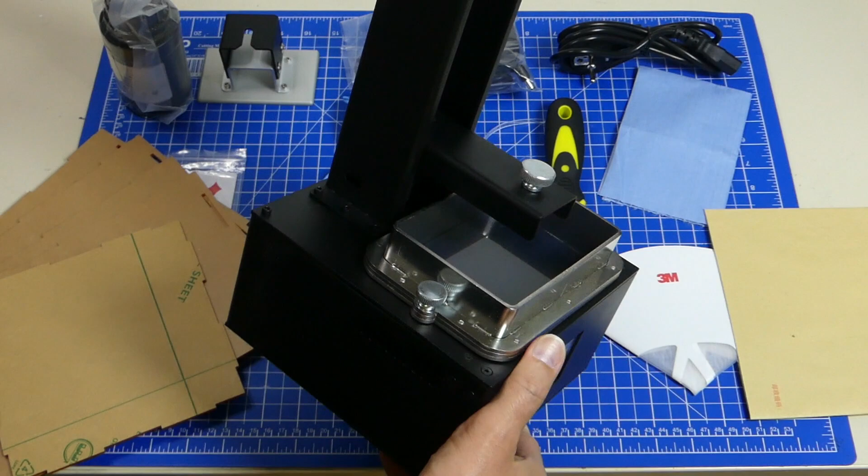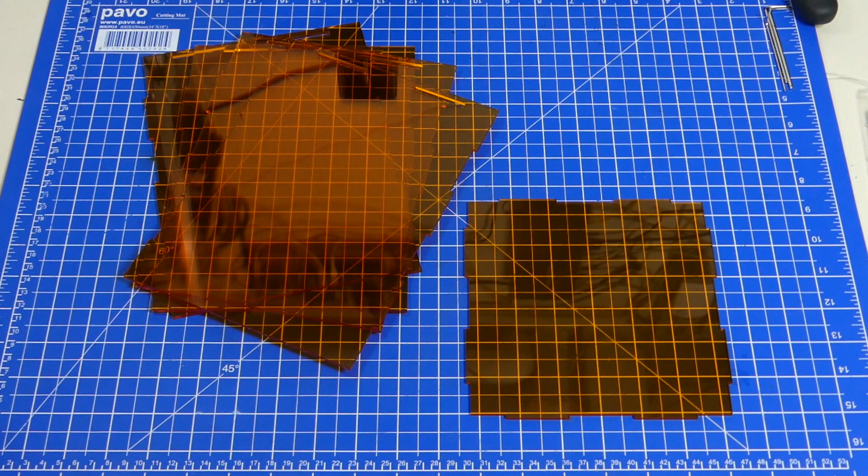There's also a manual in the box, which is surprisingly good. I went ahead and removed the protective film from the sheets of acrylic, and it's actually really simple how these fit together. They're just one pattern, and this just follows on all around.

And that is also what the rubber bands were there for, because once you have it all in one piece, you're supposed to put the rubber band over it, and that's going to hold it together. That is simple but pretty effective. So far, it's true that it comes with some assembly required, but this is extremely simple.

Let's see if we can get the rubber bands to go on. So, here we go. Right, so this is not the way to do it. Let's try again. And maybe this time we'll just start from the other side. So maybe it's not as easy as I thought, but it's also not that bad. If you pull it over the edge of the table, it is actually pretty easy.

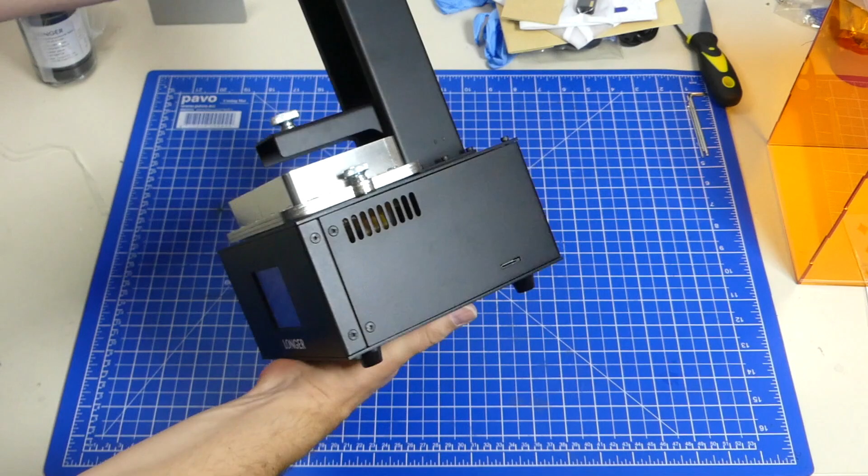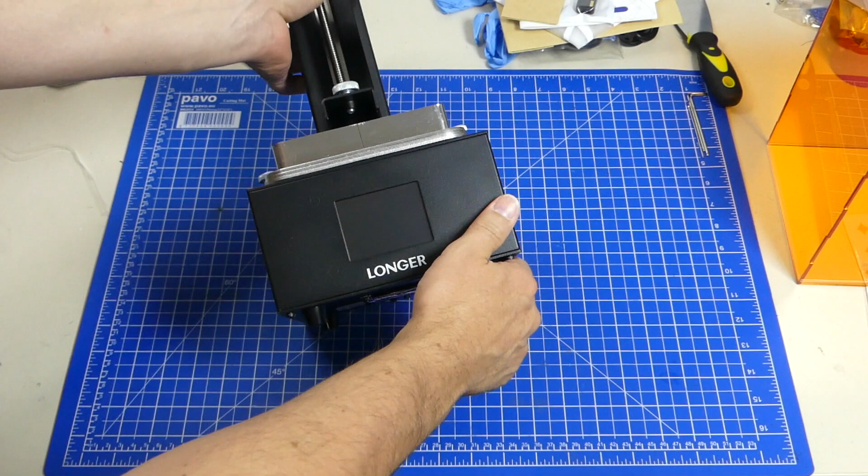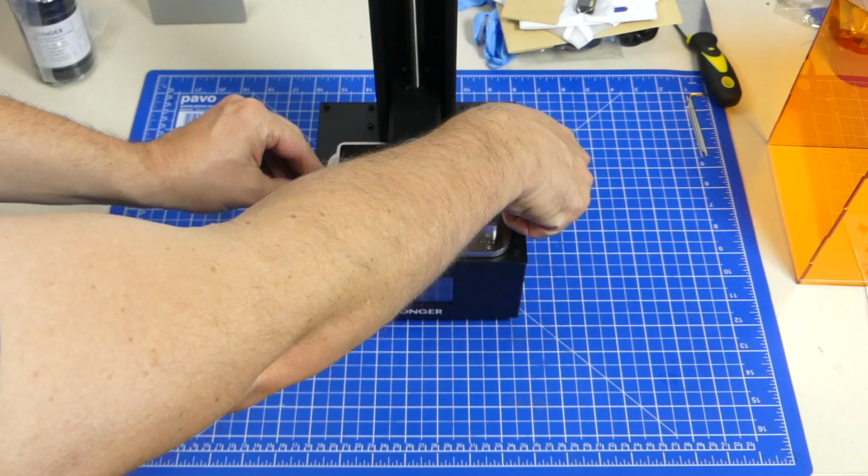Pretty simple: power connector, power switch, SD card slot, and display with touch interface, and the reservoir for the epoxy or the resin. That is in here. The FEP film is also already in there.

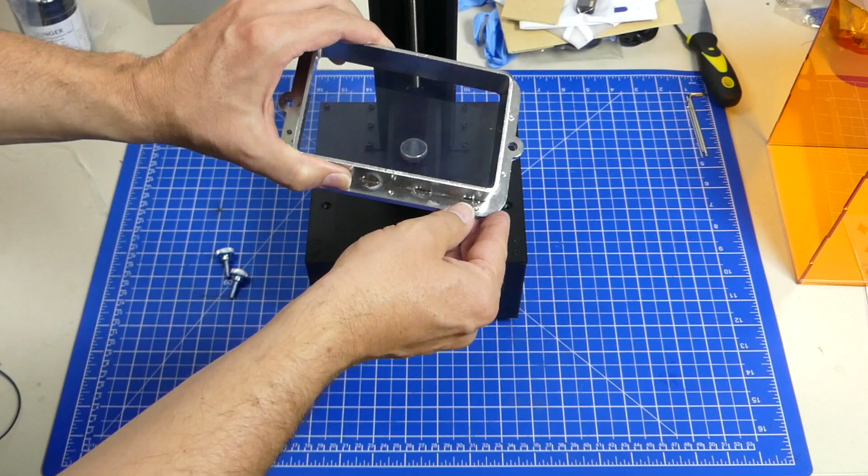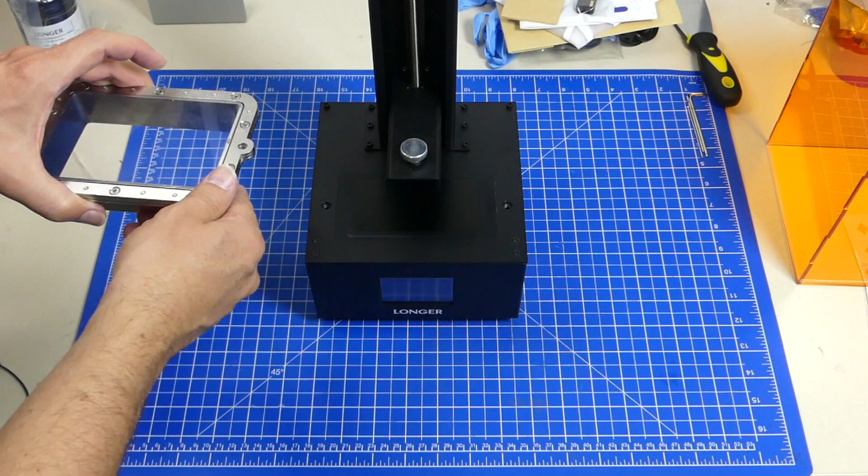The only thing that I noticed is my printer was really dirty. There was a lot of dust on it, like it's been where somebody cuts wood or something, and that stuff really sticks to the FEP film, and it's also on the inside here. So I don't know how I'm going to clean this up, but I will have to do it at some point.

The next thing I'll probably have to do is get the build platform mounted, which basically only mounts onto this screw, but the height needs to be adjusted so it sits down level on the LCD. When the LCD exposes a picture, it should be flush with the build platform. That's the only thing you really need to look for when you set up your printer. Once that has been leveled, you're basically done setting it up.

And that's one of the things I like about these types of 3D printers. They're really easy to set up, and you can quickly start printing. Getting them cleaned up and finishing the print and getting it to cure, that's what takes the time. But just starting the thing up, pouring the resin, that is super quick, and it's a lot easier than threading filament, heating up the printer, making sure your nozzle's not clogged. Compared to that, these printers do really have an advantage. Later on in the print, this kind of fades a bit, but for a start, this is really nice because it's so easy to set up, and you're really printing really quickly.

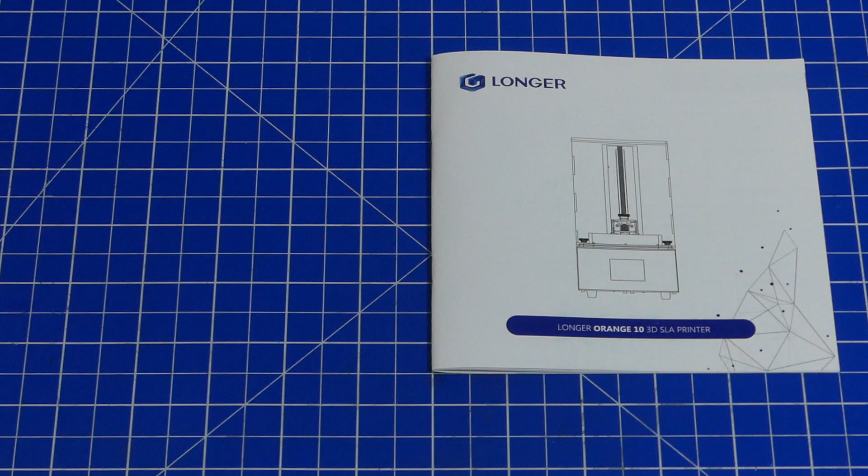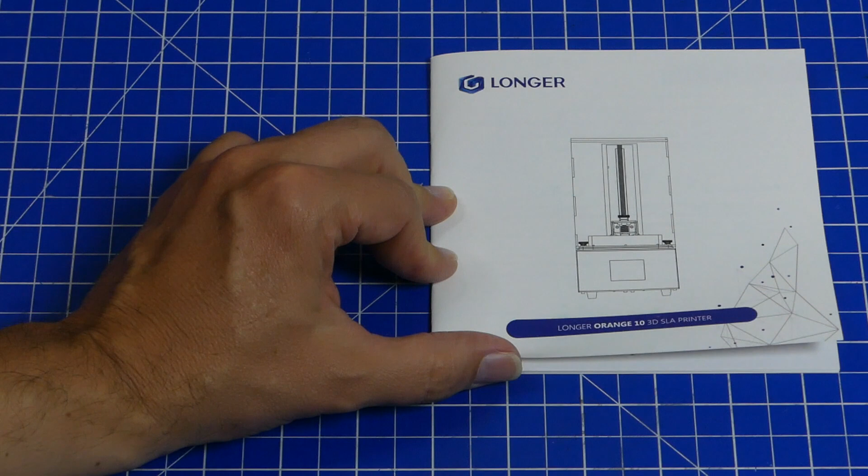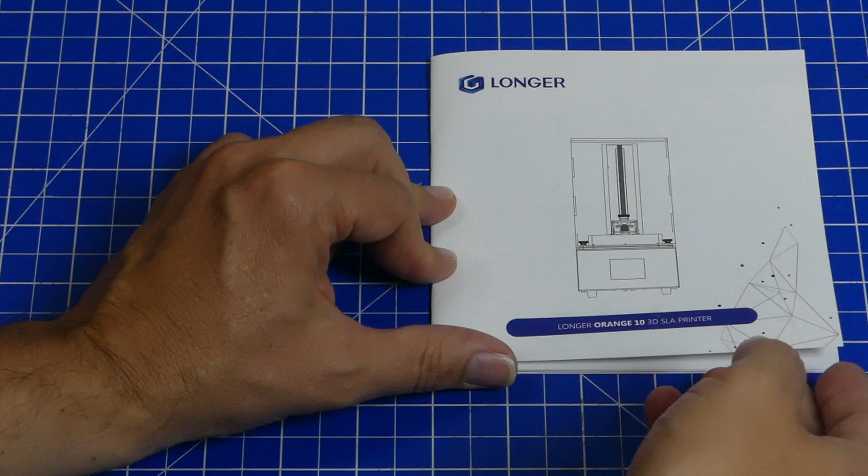So just for a minute, let's have a look at the manual, because I quite like the manual. At the beginning, it just says Longer Orange 10 3D SLA printer. Strictly speaking, it's not an SLA printer as such. It is more or less a photo curing printer because it doesn't have real stereo lithography - it's not actually focusing on the plane, it's just basically curing one slice after the other. There's a small difference in there, but let's just leave that.

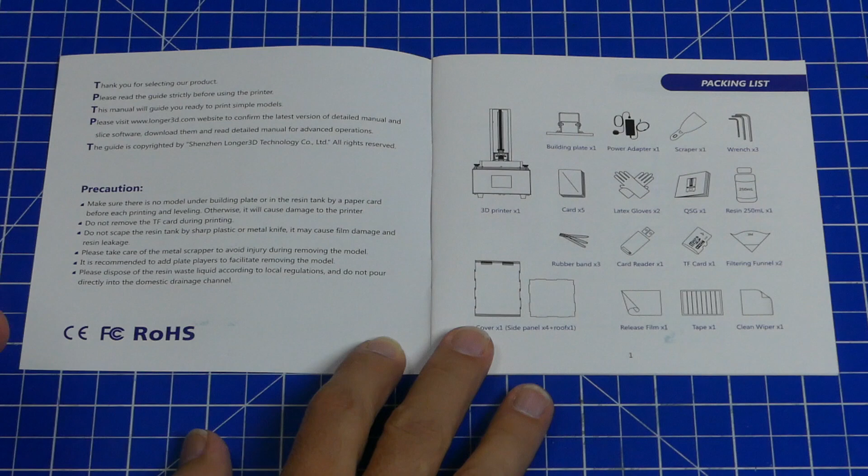So it is a really nicely made manual, and whoever made this went into detail so people understood what they're doing, and I really like that. There are the precautions, and they're spot on. The packing list is simple.

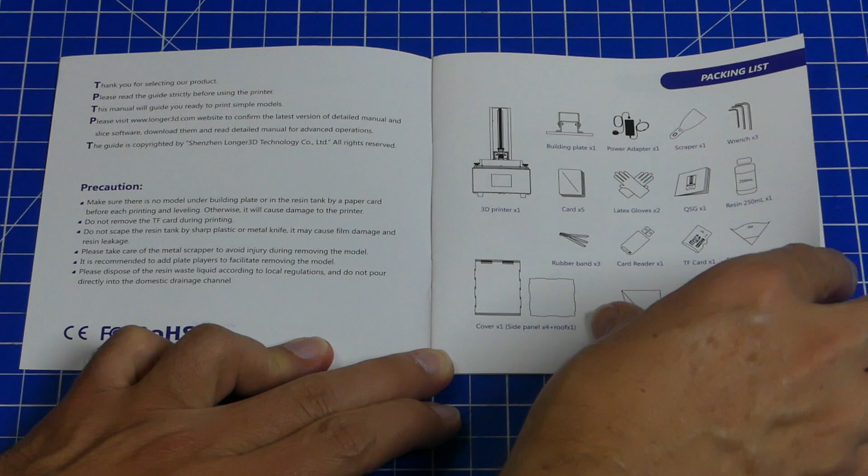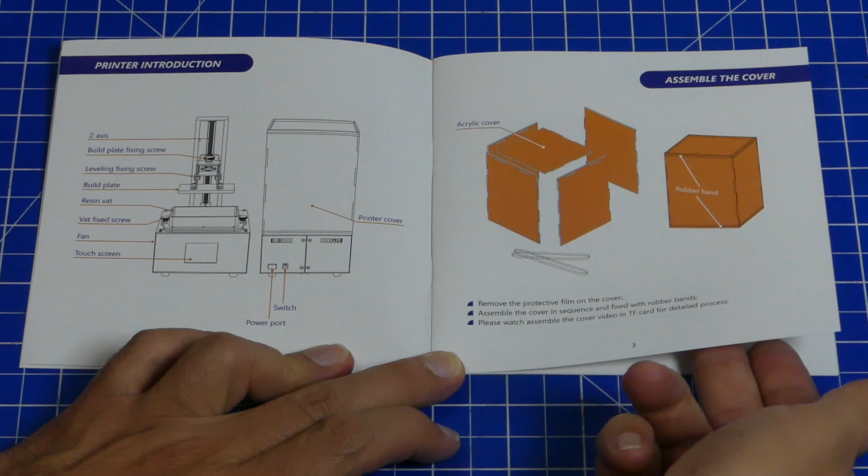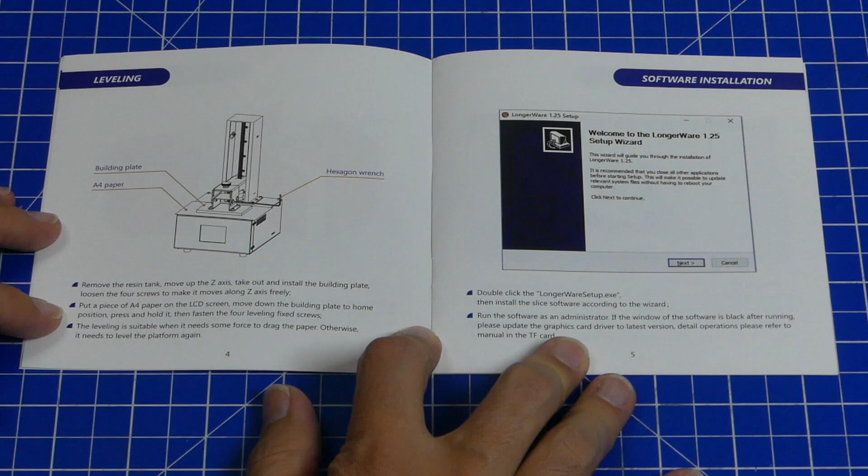Putting everything together is simple but concise. It's one picture, and these few points, it just tells the whole story, and I like that. Setting up the printer, what are the things? What is everything called? How do you do every step? It's kind of all in there.

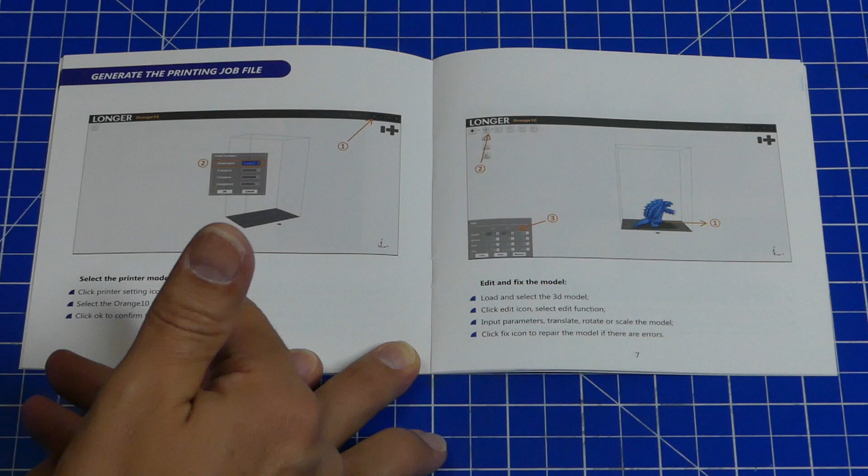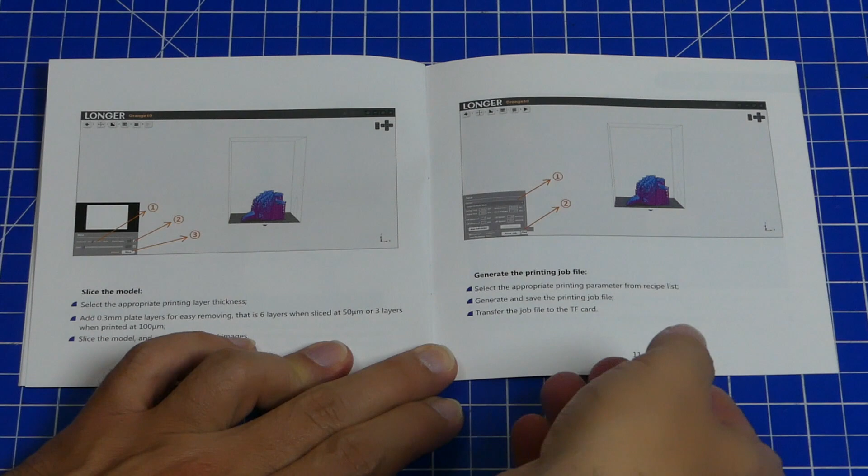Then there's how to generate your job file from your model, and they go into detail. They tell you a lot. They tell you how support works, why you have to do it. It is pretty nicely done. Although there's not a lot in there, it's more than other printers have, so I'm pretty happy with this. I really, really like the way it was done.

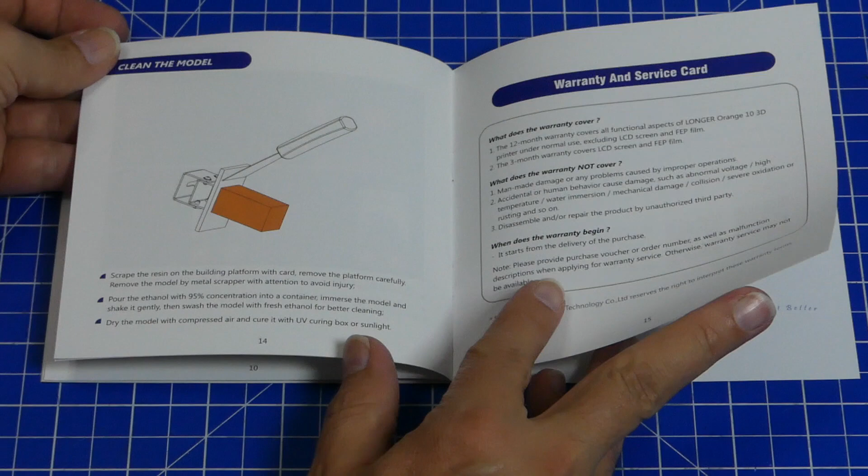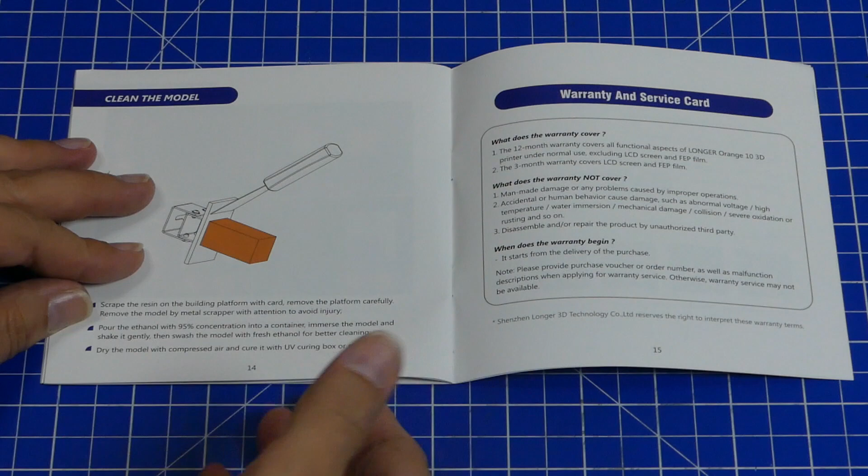They even go through the steps of how you clean it, how you dry it, and how to cure it in the end. It's simple, but this is a good manual. It really is. Setting up the build platform is pretty straightforward.

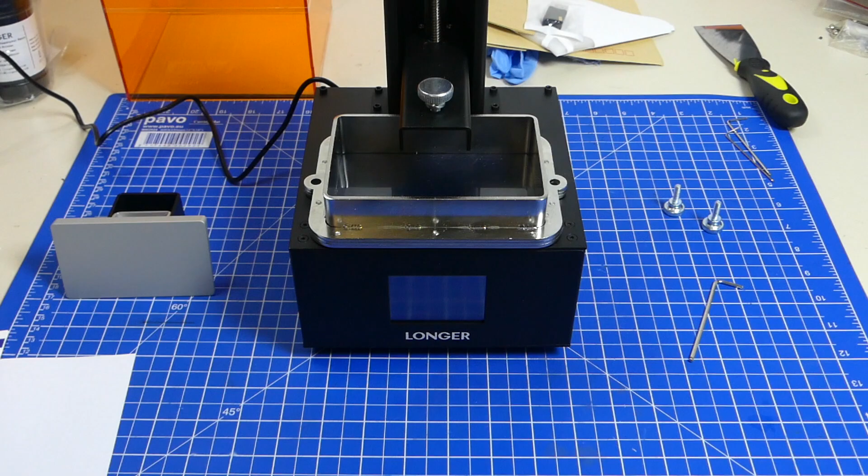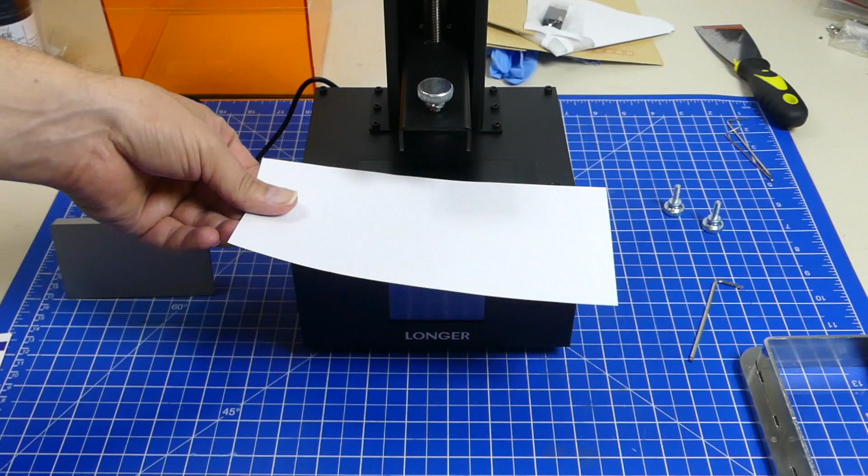What you need to do is remove the tank. Once you've removed that, you need a piece of ordinary paper, and you place that on top of the LCD to avoid scratching it and to have something between the LCD and the build platform that is roughly as thick as the FEP is, preferably a little bit thicker than that. After that, we can already mount the build platform, which is in its loose state.

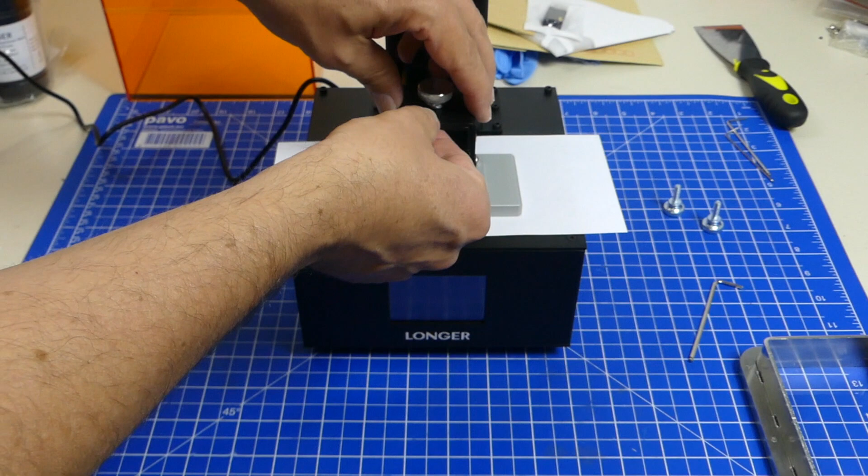We tighten this with reasonable force. Make sure that this sits down well. The paper should be moving a little, but just really a little bit. Now we need to turn on the 3D printer.

It's quite noisy. We've got the tool icon here, we can just press that. We can press the move button, and then we can go to the go to zero position or home position icon and just press that once. It's going to ask us to make sure that there is no model below the build plate or in the resin tank, which is sensible, and we can say OK.

What it just did was its homing movement, and now the build platform is where it is supposed to be for its zero position. What we can then do is really carefully tighten these screws one at a time.

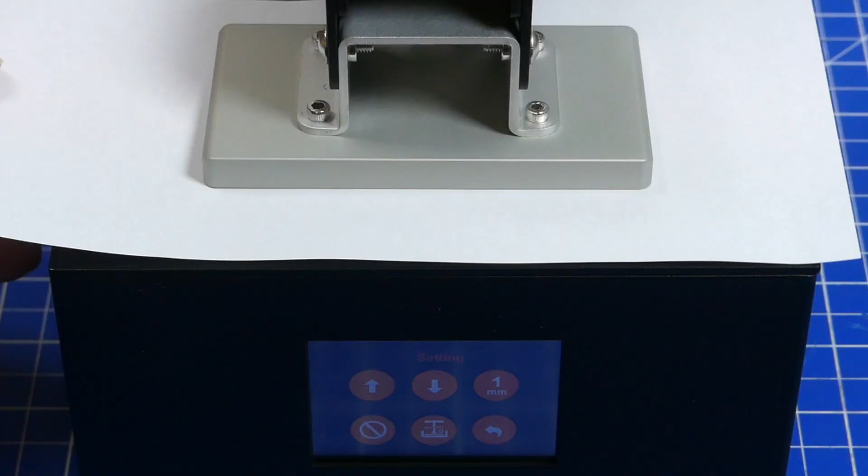Making sure that the build platform remains on the paper and doesn't put too much pressure on it, so it should just be resting on there, and the paper should be relatively easy to move. This is not, because it is pressing down over here, so I'm just going to loosen this side up a bit and give this a chance to come back up.

And once you've gone through that, yep, so we can move it up, remove the paper, put the paper back on, send it to the zero position again, and yeah, it's pretty good.

So let's have a look at the specs of the printer for a second. The size of the print area is 98 by 55 by 140 millimeters. The resolution of the LCD below that is 854 by 480 pixels, which gives us a pixel width of 115 micrometers with almost square pixels. That is not as good as you can go, but it isn't so bad either at 0.1 millimeters. You can work with that.

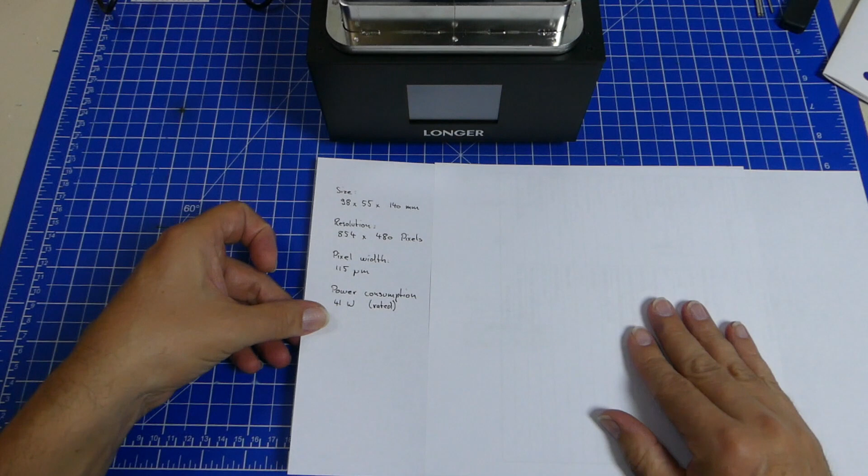But let's continue. So basically, there are a few differences between 3D printers that have LCDs and UV LEDs. You have two different models of doing it. Either you have one very large LED, which illuminates the LCD from the underside and shines through the FEP film so it can build the object up to the top. Or you have the model where you have a lot of LEDs on the bottom, but the LEDs aren't as far away from the LCD as they would have to be with a single LED.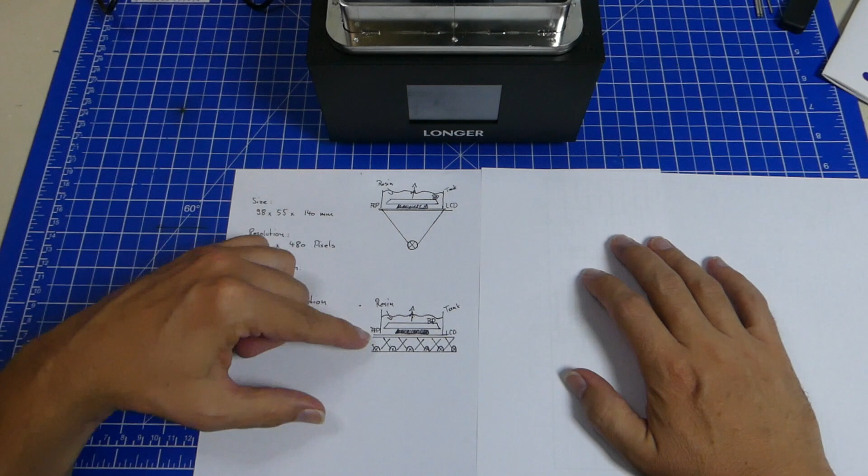The Orange 10 is this model. So it has a number of LEDs under the LCD, and basically each LED is supposed to illuminate a space under the LCD, but the one right or left of it can shine into that a bit, which causes ghosting. So although the pixel width is 115 micrometers, we can expect the pixels to be slightly larger than that.

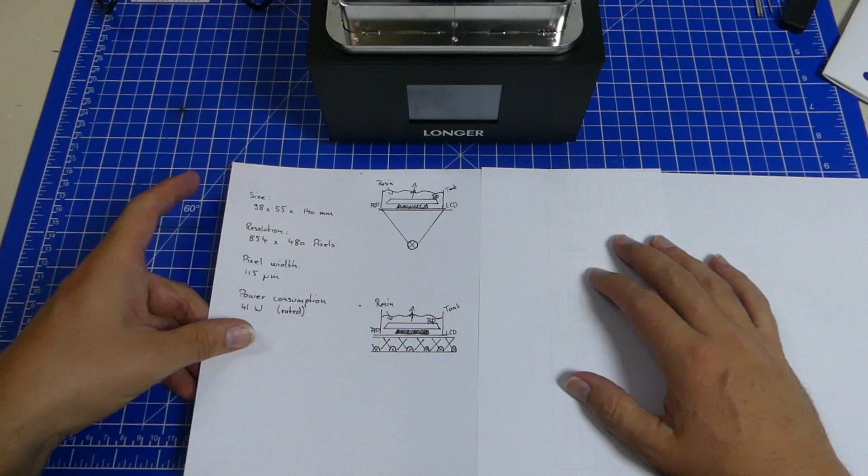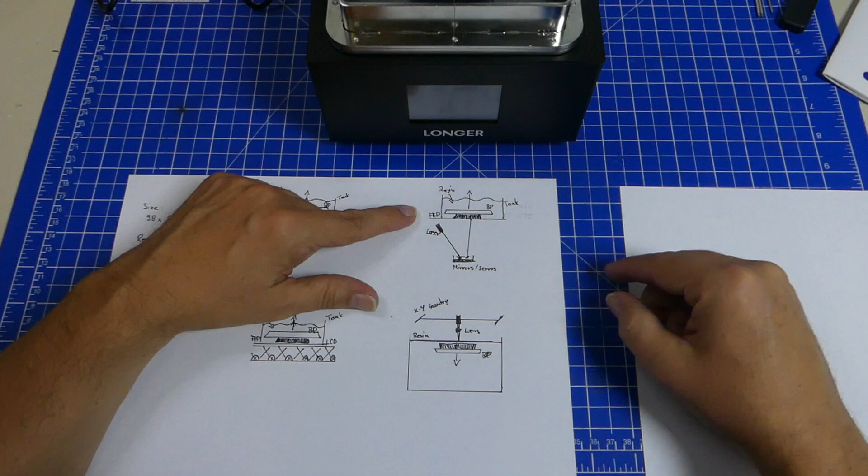Just for reference, DLP or the standard SLA method is also there, but it works completely differently. With these, you just have a laser and some mirrors that move the laser beam along the FEP, and the object is traced. Every dot that's supposed to be solid in the resin needs to be exposed by the laser, and that can take a long time. It works a lot like standard FDM 3D printers, and it takes a long time to go through all the layers before you can move the build platform.

The LCD-based system is a lot faster than that because it can expose one layer at a time. So it exposes the layer and then the head moves.

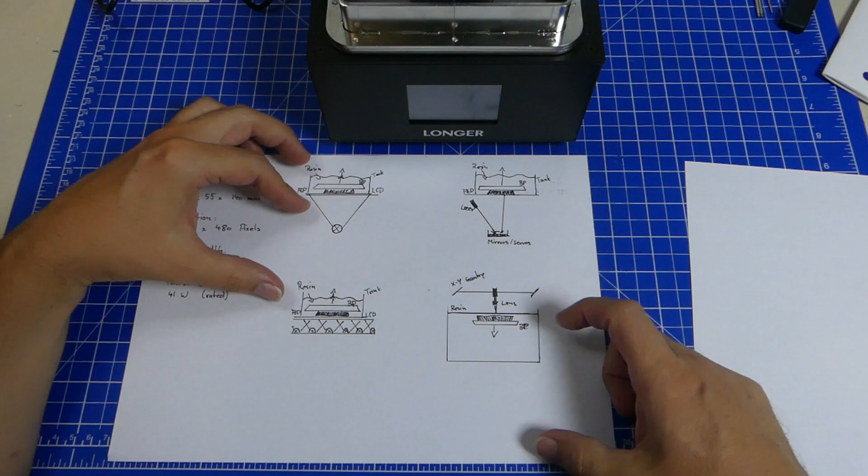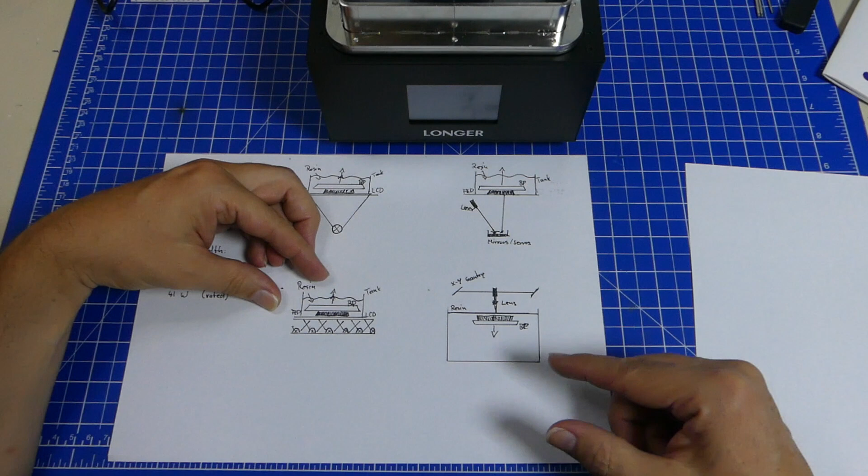The standard SLA term is actually pretty old, and it stems from a setup where there was a laser and a lens above the resin that would hit the resin and focus the laser at the exact spot where it was supposed to cure the resin and form the object. But the build platform would be moving downwards into the resin, and it has the disadvantage that you don't actually know how much resin you've cured, because when you cure the resin the size of the molecules changes. Also, it's really hard to keep the surface of the resin absolutely flat. So this is a very old concept, and it still works and is still being used, especially for metal printers or powder plastic printers, but it's very different from the implementation that we have here, which the Longer Orange 10 has.

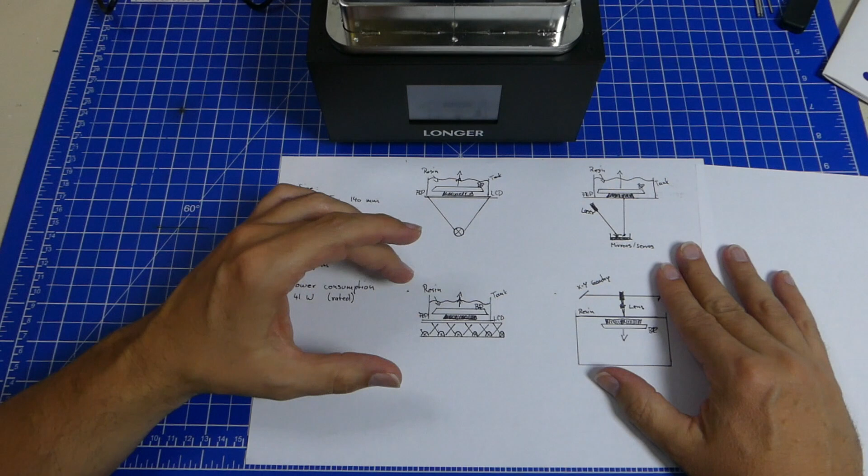So we have a printer that is built like that. You'll also note there's very little sensitive technology involved here. It doesn't need a laser, it doesn't need any mechanics that have to be really complicated and big. It just has the LCD, the LEDs, and a single stepper to pull up the build platform. That's one of the reasons why these 3D printers are so easy to use and so easy to make. It's just a jump in technology from standard FDM printers.

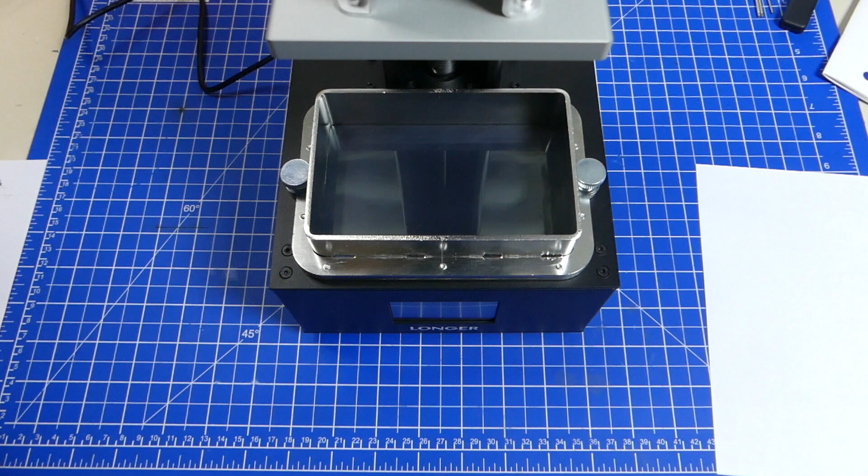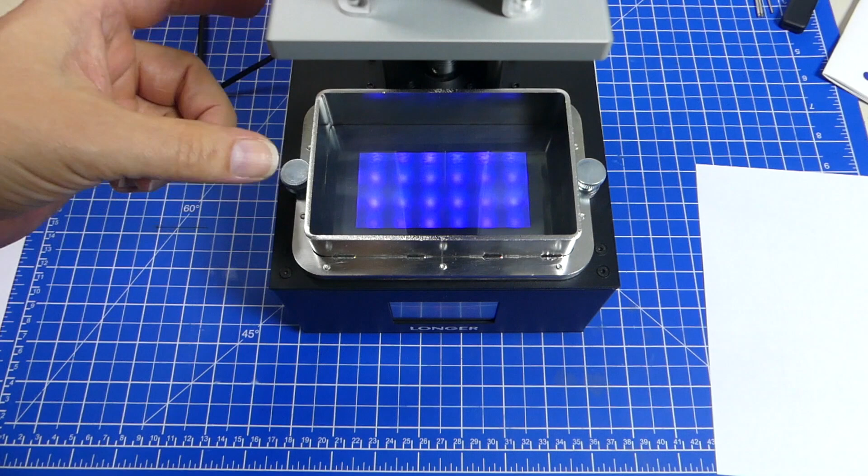Now we can actually see the LEDs at work when I turn the printer on, and when I set it to diagnostic mode and turn the LCD on at the bottom, we can then see the LEDs coming on, and this is the raster of LEDs that we have below the LCD screen. That's very easy to see. Let's turn it back off and turn the printer back off.

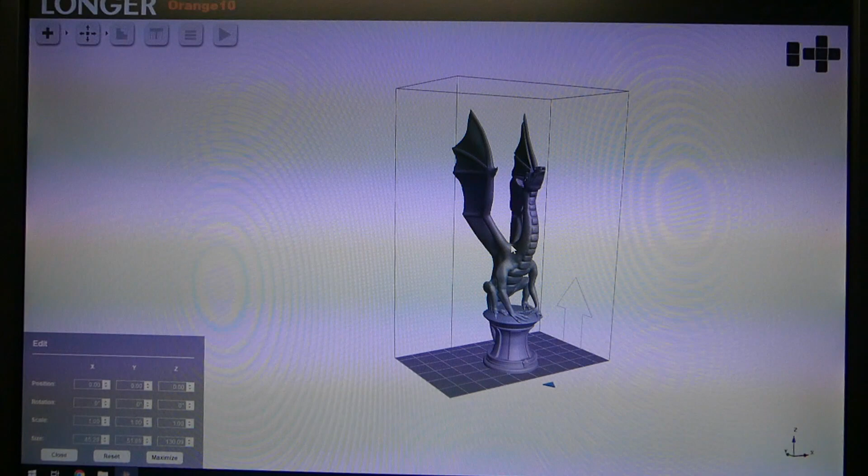So let's have a look at the software. The software is wonderfully simple. It's called Longerware, and once you load an object, it just places it on the build platform. If you select it, you get your three tool buttons: translate, which means move the object on the build platform; rotate, to rotate it on the build platform; and scale, which if you just select the object and pull your mouse up and down, will scale the object.

At the same time, once you select one of these tools, you can see what's going to change on the object itself, and you can really easily read the size in X, Y, and Z. This is probably as simple as you can make it, and it's just wonderful. I really like it. If you want something simple, then keep it super simple.

You can also fix things in the object, so if it detects a hole or if it's non-manifold, it will attempt to fix it, which works reasonably well. Once it's fixed, you can generate supports, which it will do for you, or you can manually add some. You can have the object lifted off the build platform, which is good if you have something that is round, for example. And all of this is super simple.

Once you're done with that, you just click on slice, and it lets you select the thickness, and that is basically all you need. You can then go through the object and see what it looks like when it's being sliced, and after that you just click on export to save the job. Once you've sliced it, you can even have your special recipe for the type of resin you're using and for the print speeds you want to run with it.

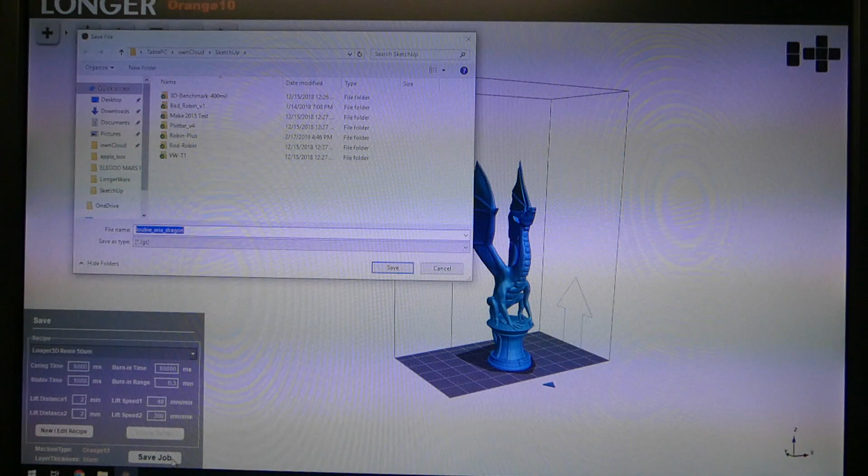Once you do that, it'll ask you for a file name. It'll save it with the LGS extension, and you can put that on your SD card and print it. This is so wonderfully simple. I don't know why other software can't be like that.

It doesn't have special jobs, for example, for putting drain holes into the object or for generating special forms of infill, but that's the point when I want a special software. If I just want something that will slice it and print it, it can't be any simpler than this, and it's worked out fine for me. So the software definitely gets a thumbs up from me. It is simple, but it's really beautiful in being simple, and it just works out, which for this type of printer is probably what sells it the most. It just has to work.

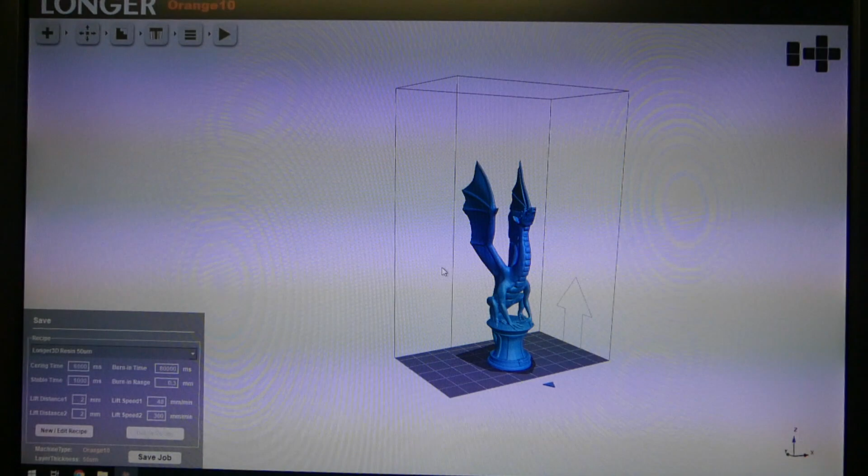If you want something really specialized, you want a software with all the bells and whistles, where you can tune every setting. But for a small and simple printer, this small and simple software package really sells it for me.

Okay, now I've prepared my print. I've got it on the SD card, and the SD card is in the printer. I've got resin from Longer, and I'm going to pour this into the tank now, turn the printer on, and start the print. I'm going to do this with the studio light turned off, because in my experience the studio light is a little too UV heavy and actually makes this stuff harden. So see you in a minute.

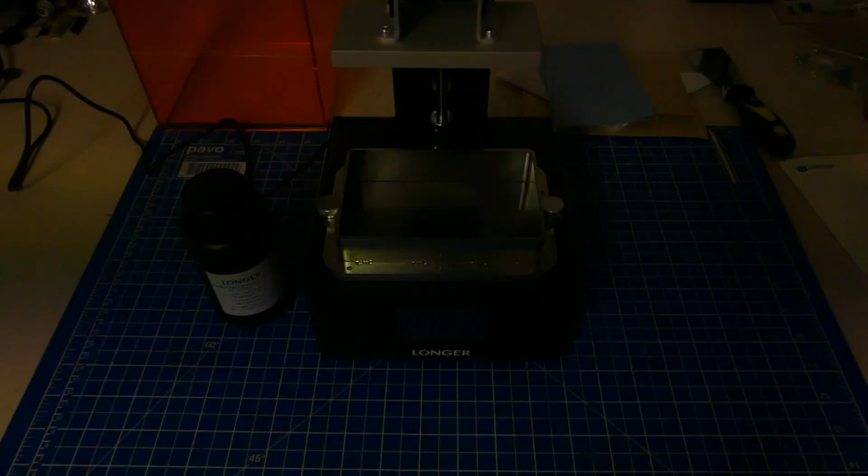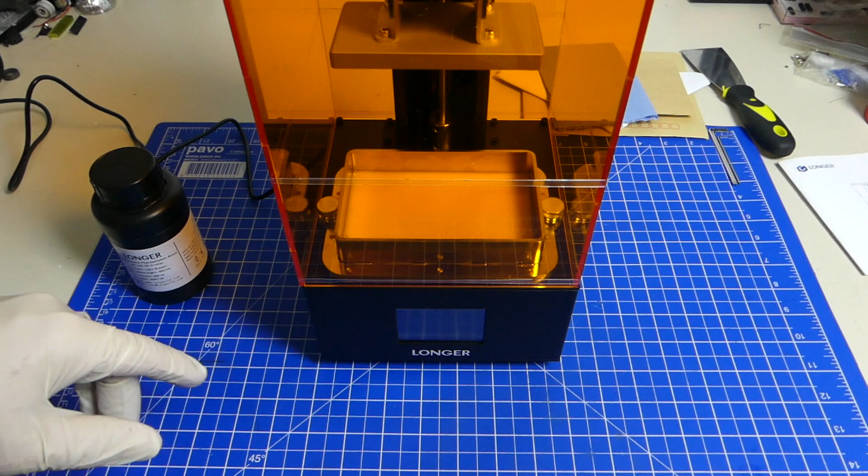So here we go, the resin is inside the printer. I did give it a good shake. Always shake this stuff before you put it inside, because the color will separate from the rest of the resin. And if you want it to look good and cure well, always remember: shake before use. Now let's turn the printer on.

And it's noisy. I'm going to select my file. There we go. And click on print.

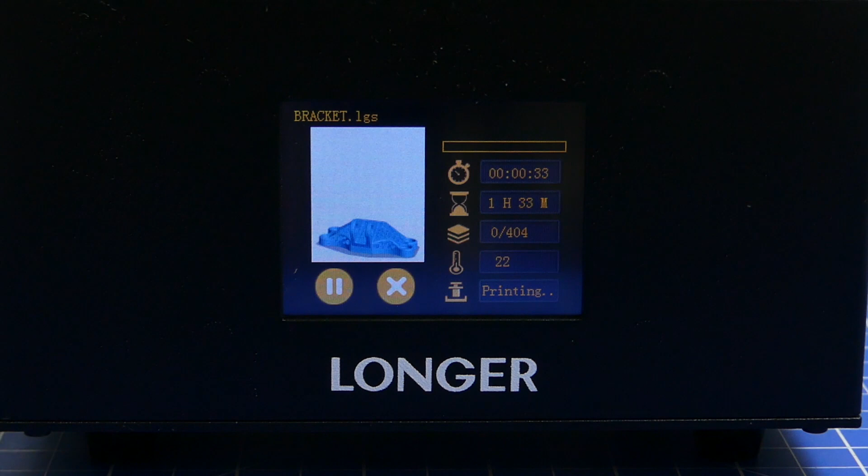So the print process is running now, and it will run for about an hour and a half.

I'm using one of the pre-supplied samples on the SD card, which is something I always do, because it helps you get a feel for the timings the manufacturer used to create a print that's supposed to come out right. And if nothing else helps, you can get a stopwatch and time the settings they've used. Most of the time that will help you find some good baseline settings for the printer software. So I'm going to let this run and come back every 20 minutes or so to have a look at how it progresses.

But it looks quite nice.

And it's still doing the bottom layers right now. You can see that because it's exposing longer than, say, 10 seconds. Usually the bottom layers are somewhere around 60 to 120 seconds, just to make sure they stick to the build platform. So the printer's now finished the bottom layers and is progressing to the higher levels.

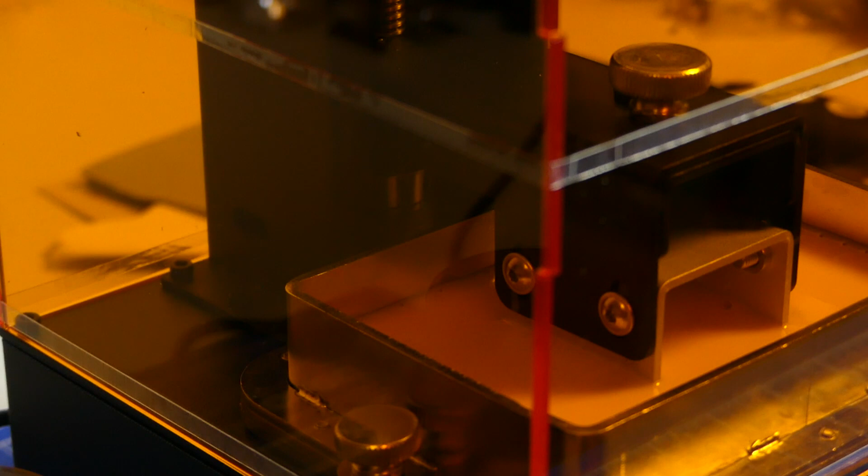You can actually see the stepper motor in the back going to work, lifting the build platform up first slowly, then a bit faster, and then positioning it back down.

And this is actually really simple, and it makes these printers relatively cheap to make, because you don't need any expensive spindles — it's all based on very simple movements.

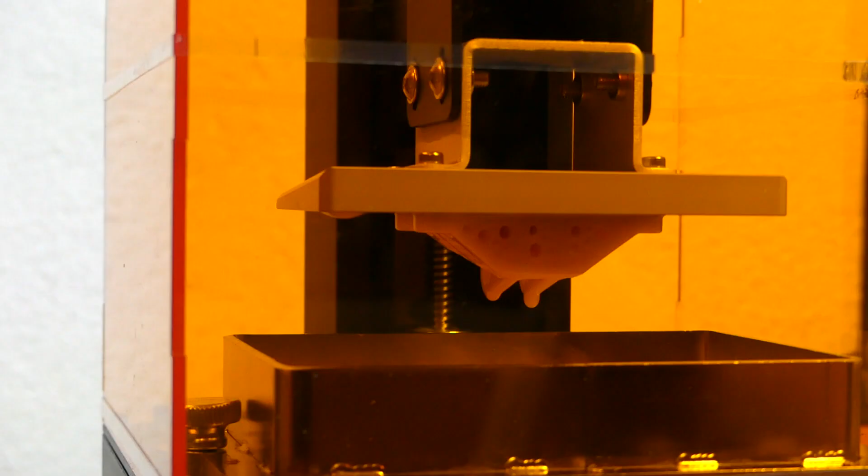So it's about 2 hours later and the print is done. As you can see, it's still all drippy, and resin is coming off of it and out of it. What I'm going to do now — and I need to turn the lights off again — is remove the build platform and let some of the resin drip off. After that, I'm going to try to remove the print from the build platform.

I've got 2 glasses of isopropyl alcohol, number 1 and number 2, right beside each other. I'm going to try to first clean the print roughly and then do a fine cleaning, and we'll have a look at it then. After that, I'm going to put it into my curing chamber for about 6 to 8 hours, just to get it all cured and hard. Then I can have a look at the part itself.

So the print itself was completely uneventful. It just went through its printing procedure. Apart from being rather loud, there was nothing about it. It just did its job, which is what I expect. And when I'm done with this, I'll come back and show you the result.

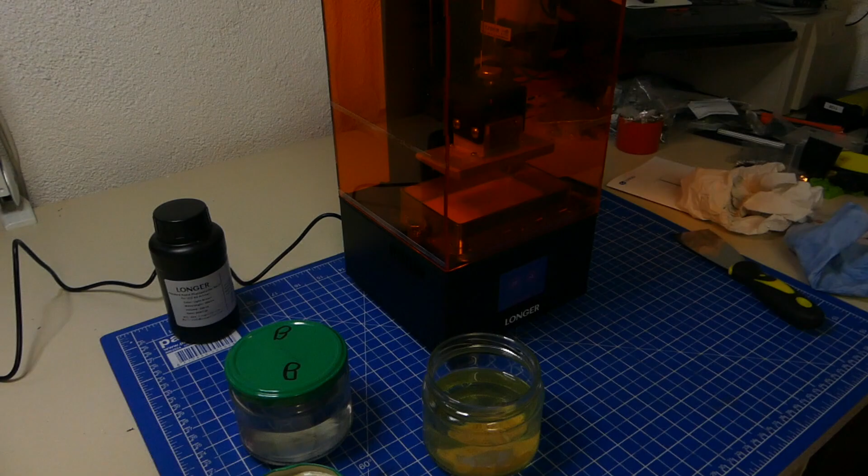So I did get the part removed. It was a bit of a fight because I couldn't find the knife I usually use for this stuff. I'm just going to leave this in the alcohol for a couple of minutes. The alcohol is going to loosen, but not dissolve, the resin, and I can then use gentle motion, kind of a brushing motion, to get this off.

It is quite important to get all of the resin out of here. Since people do ask a lot, once the alcohol is very much full of resin, I actually put it in the curing chamber for about half a minute or so and turn it on, and all the resin in the alcohol solidifies, and I could just pour it through a filter and reuse the alcohol, getting rid of the resin that was in there.

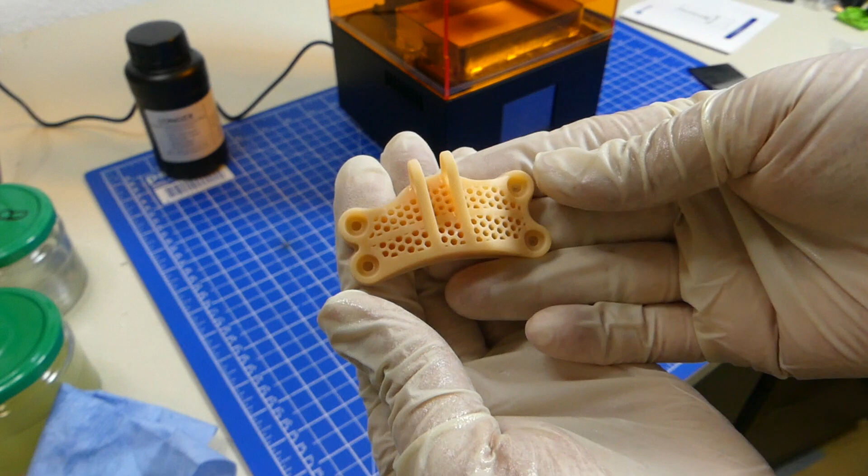So here we go, this here's the part that I printed, and it looks really nice. Bearing in mind that the resolution of the printer is only 0.115 millimeters, this still looks very nice.

I can't actually make out any features from the edges of the pixels, even by looking really close, but that is to be expected because there are so many LEDs in there. We do get a little bit of washout on the resolution of the print that we're getting, but this is really nice. This is extremely nice.

So let's get it into the UV chamber.

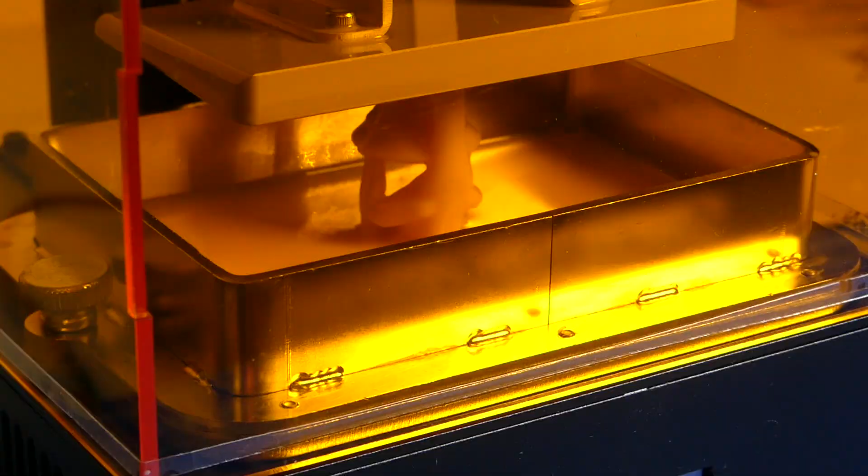So let's have a look at the sample prints and the prints that I sliced myself and how they came out. And in short, they came out absolutely perfect. There is nothing that I can expect more of this printer. So yes, I can see the resolution in the print, but it is so finely structured, it looks so clean.

And all the surfaces are so great, and all the details are just the way you want them, that I, for one, am pretty much happy to live with 115 micrometers resolution. The speed was surprisingly good, which is due to the matrix LED under the LCD, which just makes it possible to go this little bit faster.

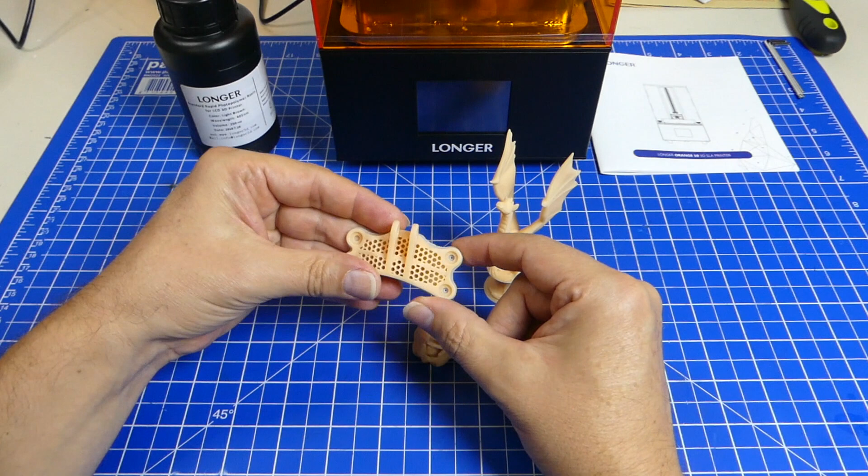And all the other details, the handling of the resin, everything that has to do with the print itself is just as good as on any other resin-based printer. I admit it might not be as pretty as some of the leaders in that field, but I can live with that. This is not a really expensive resin printer. It's not the cheapest either, but it is fairly reasonably priced. And I, for one, really like it.

I was expecting some problems. I was expecting to see a lack of quality, but there's been none of that.

So I really love the software. I love it for its simplicity, and I've been in contact with the guys from Longer, and it is possible to export prints using Chitubox software and to repackage it for use with the Longer printer. For whomever needs all the bells and whistles that Chitubox has, that's a viable way to go.

For somebody who just wants to get printing and wants to get printing fast, and who's happy to design his prints or to get his prints and not modify them, hey, you've got the perfect software there. The printer's also really small, and there's no quality problem with it. For me, it just worked. It worked really well. I had no problems.

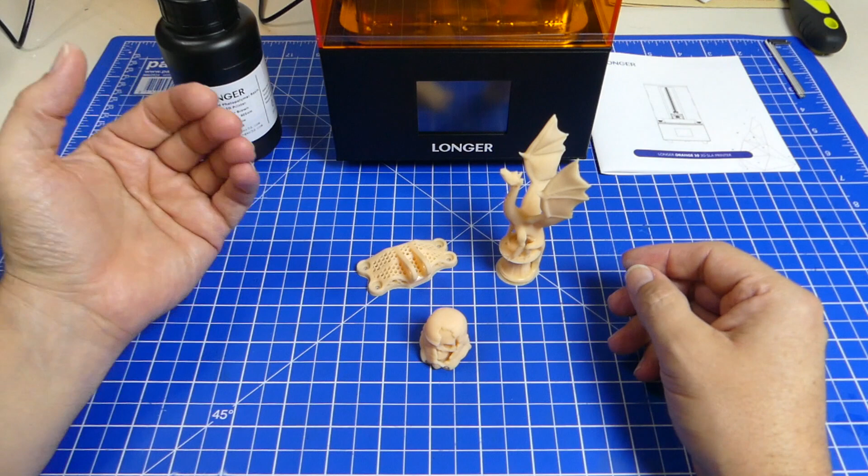It was fast. It was a bit loud. It was louder than others, which isn't really a problem, but because you can't put this in your living room because it just smells so bad and because the fumes are potentially dangerous, you will want to put this thing aside, and if it's been put aside, it can be loud.

So I'm really happy with this thing. It was quite a surprise, and given the price, I would recommend it. I would really recommend it. It is a very small printer.

It comes with a lot of stuff that the others don't come with, for example resin. The software supplied is great. The manual that you get is also pretty good. All the included stuff helps you get your first print out the door, but then you have to invest in time and material, and most of all you have to invest in isopropyl alcohol, because you need a lot of that. But this thing gets you going pretty quickly, and I suppose that's the best you can get.